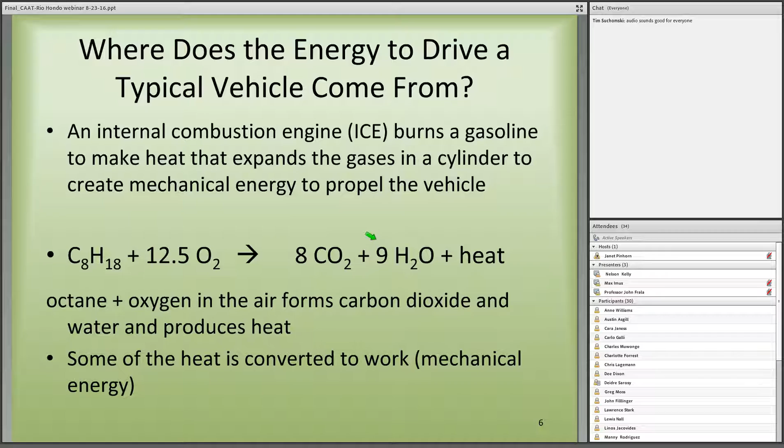And your car is very well set up probably. It has an air-fuel ratio sensor and keeps the mixture what they call stoichiometric, so it's just the right amount, not too much fuel, not too much air. And that system's been very optimized. And it's very reliable and relatively inexpensive. And it uses liquid fuel gasoline that's easy to find, has a high energy density, you can refuel in a few minutes.

But even that perfect combustion that's been around for a long time emits pollutants. It doesn't just emit CO2 and water. There are other things which are regulated by EPA, which I'll mention in a minute. And even that carbon dioxide, a greenhouse gas, and then the slow using up of petroleum, which is a finite resource, isn't sustainable.

Also, that heat engine has something that's called the thermodynamic Carnot efficiency limitation for heat into work. It's about 50 or 60% is the maximum efficiency for the highest temperature and the lowest temperature in that engine. And in the real world, about half of the Carnot efficiency is reached, so maybe 25 or 30%. So that's not real good, and we'll show you that we can do better.

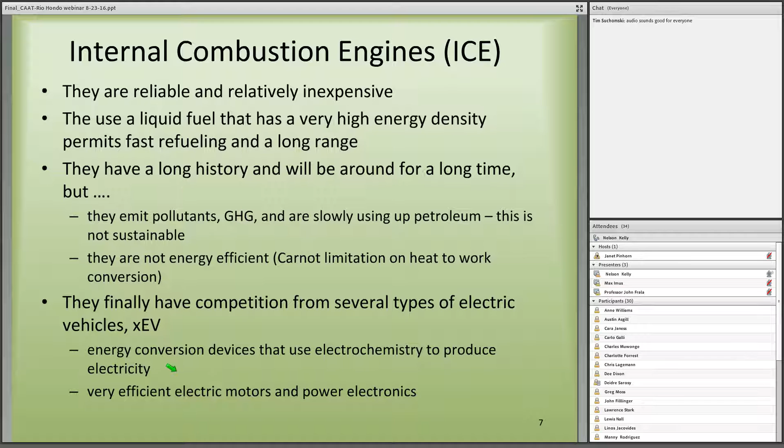And finally, this system has competition from several types of electric vehicles. I'm going to label that XEV, and I'll explain what that is in a minute. But these use electrochemistry to produce electricity, which is used by a very efficient electric motor and power electronics to move the vehicle. So why must automakers build electric vehicles?

Why can't they just keep building internal combustion engines with better control of the air-fuel ratio and better catalysts and better transmissions, et cetera? Well, the Environmental Protection Agency, EPA, and the California Air Resources Board can set pollutant emission standards to protect public health. And these are the criteria pollutants: hydrocarbons, carbon monoxide, nitrogen oxides, sulfur dioxide, lead, and particulate matter. And the National Highway Traffic Safety Administration can set mile per gallon standards, corporate average fuel economy.

So CO2 then becomes regulated as a greenhouse gas, so that perfect combustion making CO2 is not so perfect after all. And the standards are very difficult to reach. 54.5 miles per gallon by 2025, that's a NHTSA number. EPA, which worries about emissions, would say 163 grams of CO2 per mile. These two things are almost equivalent. Well, the current crop of vehicles, say in 2015, gets about half that mileage and emits about twice that much carbon dioxide per mile.

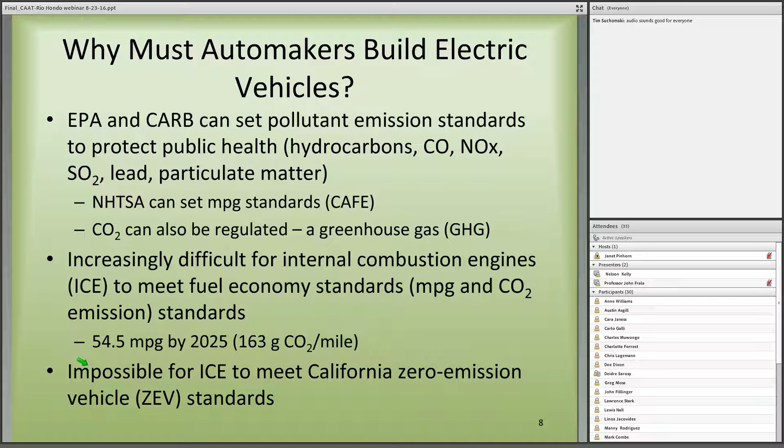So it's just getting harder and harder to meet that by improving gasoline engines or improving the ICE gasoline system. And it's impossible for that system to meet the California ZEV standards, which I'll mention and John will get into. So that's why they're moving to electric vehicles.

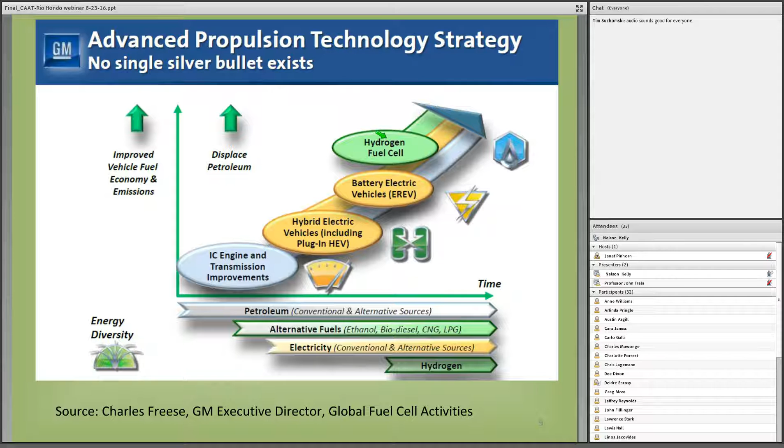So we're displacing petroleum, we're improving fuel economy, and we're reducing emissions. And you can see that at the time GM put the hydrogen fuel cell at the top here, really equal to the battery electric vehicle. So that's the strategy to follow. And it didn't have a single silver bullet. It had all of the above, but ultimately wanted to have more and more of the electric vehicles.

Let's talk about some of the different types of electric vehicles in the nomenclature. If X is H, it's a hybrid electric vehicle that has two powertrains, such as an internal combustion engine and an electric motor, and maybe two ways to store energy, such as gasoline and a battery. If it's a plug-in hybrid, that means it can put gasoline into the tank, and it can also plug into the wall to recharge the battery. A battery vehicle only has a battery, no internal combustion engine, no gasoline. And if X equals FC, it's a fuel cell electric vehicle, and that uses hydrogen. And all of these systems can help to reduce the environmental impact of vehicles relative to the ICE gasoline system.

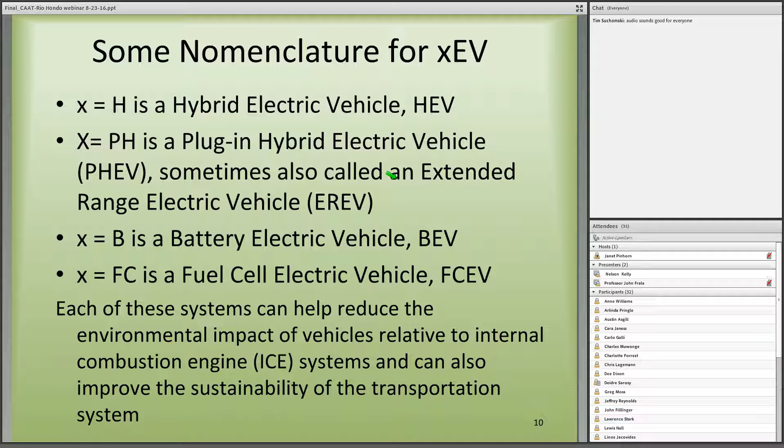Some quick examples here. The most common is the Toyota Prius. That's a hybrid that uses gasoline, but also has an electric motor and a small battery. There's a plug-in hybrid such as a Chevy Volt that tries to use mostly the plug-in. Plug it in, drive 50 miles, and then if you need more range, the gasoline engine starts. GM calls it an extended range electric vehicle, but nobody else does. That was GM speak. They did that because they wanted to say the Chevy Volt was a battery electric vehicle with a range extender. I'm not at GM anymore, so I'm going to call it PHEV.

The BEV examples are the Nissan Leaf and the Tesla Model S, and these are becoming more common, and they're quite desirable. They're getting very good press, especially Tesla, with the vehicles that have such good performance, and the desire to bring out a less expensive vehicle, which GM also wants to do with something called the Chevy Bolt, not to be confused with the Volt. But anyway, the hybrids and the battery electric vehicles are either very common or becoming common.

Now let's talk about the other, the fuel cell electric vehicle. And the one that's been leased in California is the Honda FCX Clarity, and John informed me yesterday it's now called the Clarity. It's a newer version of it. But there's also the Toyota Mirai, which is being sold in California and other places. And Hyundai also has a vehicle, a Tucson, that is a fuel cell electric vehicle. But this is the other. This is in Genesis mode.

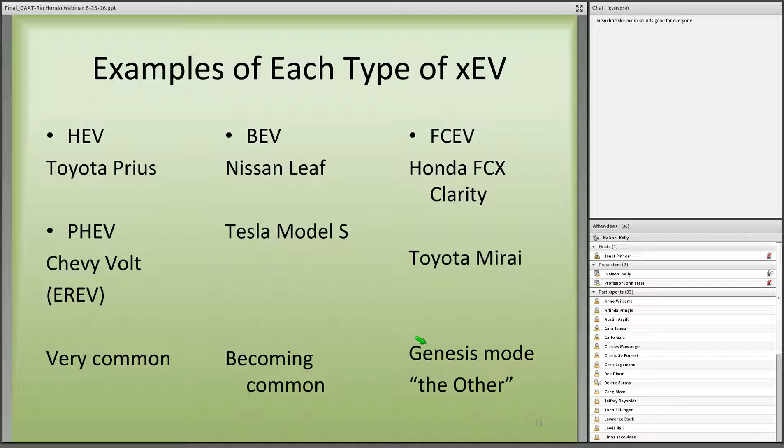So a lot of times it's one versus the other. And most people, when they think of electric vehicles, think of the hybrids because there's so many Toyota Priuses around and they work so well. They get over 50 miles per gallon, and they've been improved over and over and over again. Or they think of the BEVs, the Tesla vehicles.

And one of the reasons is fuel cell vehicles have consistently missed their introduction date. I know at GM we wanted to start selling them around 2005, 2007, and our stated goal at the time was to be the first, not necessarily the first to sell them, but the first to profitably sell 1 million fuel cell electric vehicles. And it's possible GM will still reach that because they haven't lost interest in it, but they're definitely not the first.

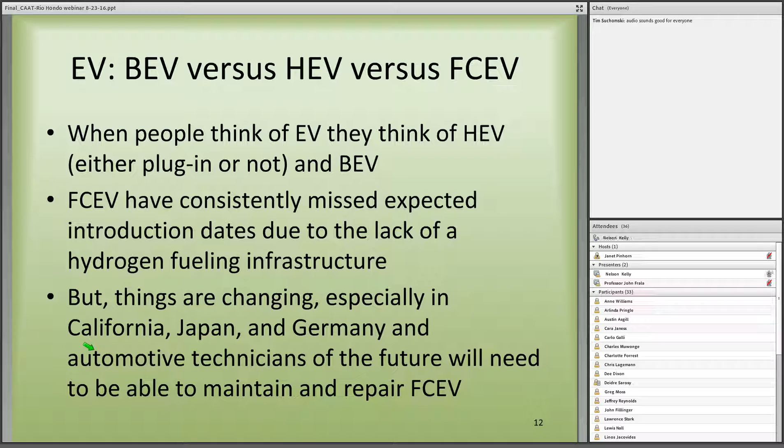And Toyota definitely is leading the pack on this, along with Hyundai and Honda. But things are changing, especially in California, as we'll point out today, and especially Japan and Germany. And the point of it is that automotive technicians in the future will need to be able to maintain and repair these vehicles, which have high voltage, high pressure gas, and a flammable gas.

To understand how fuel cells, and by the way, batteries work, you need to understand something about electrochemistry, oxidation reduction reactions, the anode, the cathode, and the electrolyte, ion flow and current flow in the system, something called the electromotive series of half reactions, the standard potential for those half reactions and how we add them together to get the total potential of the battery or fuel cell, and something called overvoltage, which is an electrical analog of mechanical friction.

We always have to pay for friction. Nothing works perfectly. I don't want to go into a lot of chemistry here, but there's kind of a foundation that you need to know about, and if it's confusing, maybe you need to take a chemistry course to learn about. And the first example of the first type of reaction that we're going to talk about is an oxidation reaction. And here's an example.

Copper solid goes to copper ions in solution, that's what aqueous means, like water solution, and gives up 2 electrons. And that's an oxidation reaction, when electrons are produced in the half reaction. A reduction is just the opposite of that. That might be copper ions, aqueous in solution, gaining 2 electrons and plating out as solid copper. Notice one is the reverse of the other.

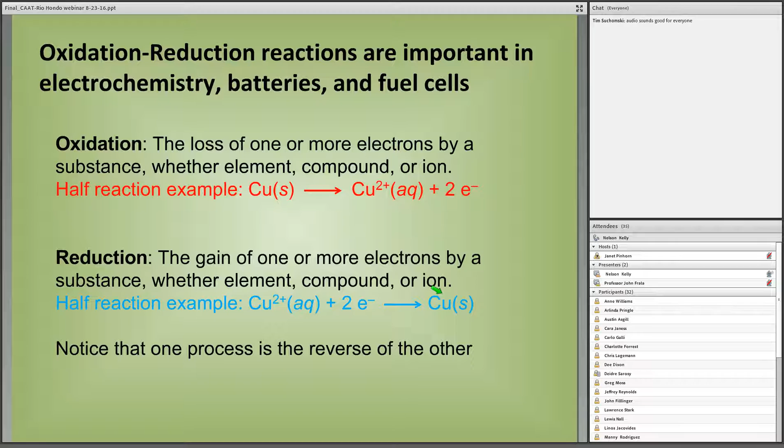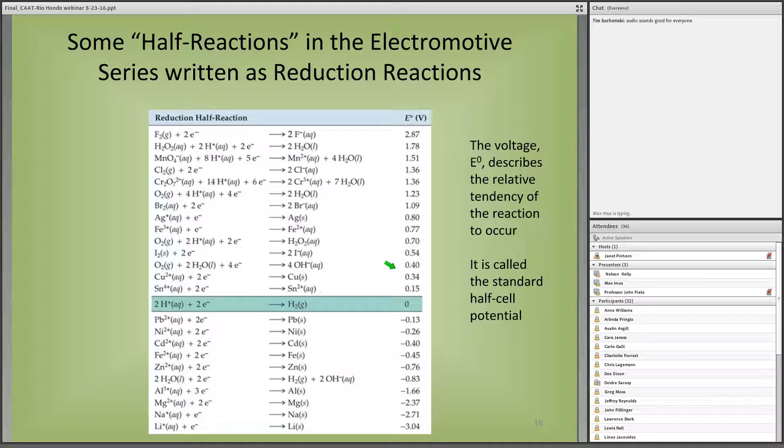I'm just going to point out up here there's also an oxygen reaction here, where oxygen and electrons and hydrogen ions go to water. That's going to be important, and that has 1.23 volts. Keep that in mind for a minute. So now, how do we add these together to make a battery? Well, we can take an oxidation reaction, such as zinc being oxidized to zinc ions, and the reduction half reaction, copper ions being reduced to copper solid.

We add the two together, and this is the overall reaction. Zinc solid plus copper ions goes to zinc ions plus copper solid, plus electrical energy. By adding together these standard potentials, it comes out 1.1 volt. This is called the Daniell cell. It was invented in the 1800s, and it's an early battery. It's a good illustration of how electrochemistry can make electricity. And by the way, this is DC electricity.

This, I think, is a real good way to understand this because it's so picturesque. Let's start in this right-hand beaker here. Here, the zinc is going into solution to form zinc ions, and this is a water solution called aqueous, and it's giving up electrons when it does that. So it's an oxidation reaction.

Those electrons make that zinc electrode, the anode, negative. The place where oxidation occurs, electrochemists always call the anode. Those electrons are flowing over here to the copper, where copper ions meet those electrons and plate out as copper. Copper ions plus electrons form copper solid in that beaker. Notice electrons are flowing in these external wires, whereas ions are flowing between the two beakers in the solution. Electrons don't flow in solution, and ions don't flow through the wire.

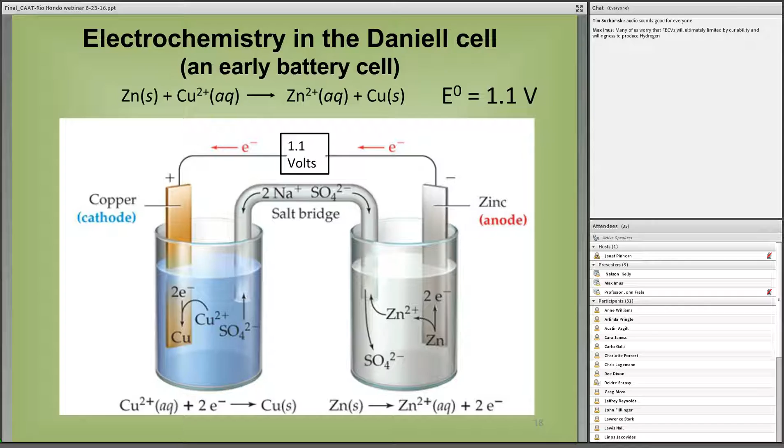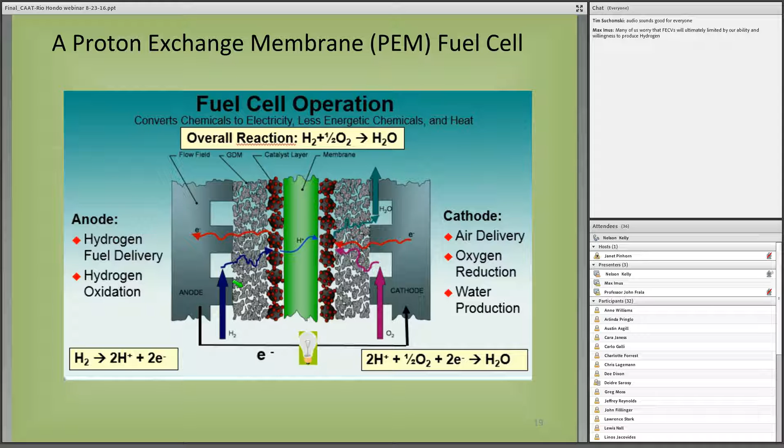So in this case, ions are flowing through this electrolyte, which is a very special electrolyte this time. It's not an aqueous solution of water. It's actually a solid piece of plastic that is permeable to hydrogen ions. And I'll point that out a little better in just a minute. So unlike the battery where it discharges, as long as we keep supplying hydrogen to this side and oxygen or air to this side, because air contains about 20% oxygen and works just fine in a fuel cell, this will keep producing current. And that current can be used to run an electric motor or do something, as I'll show in a minute. Of course, you don't use one cell. Just like a high voltage battery, you put many cells in series to form the high voltage.

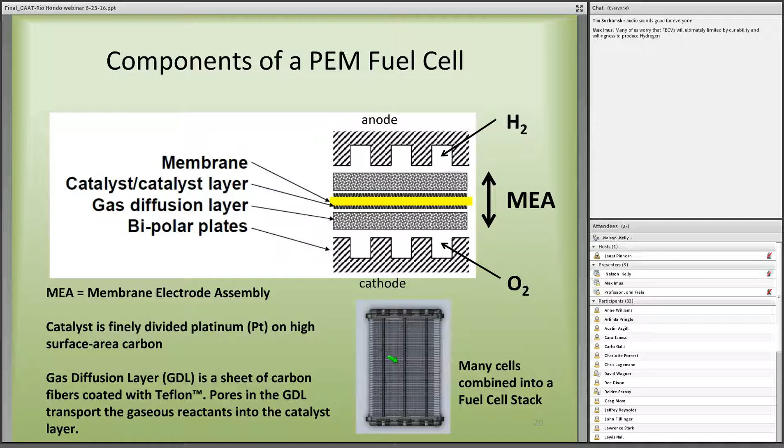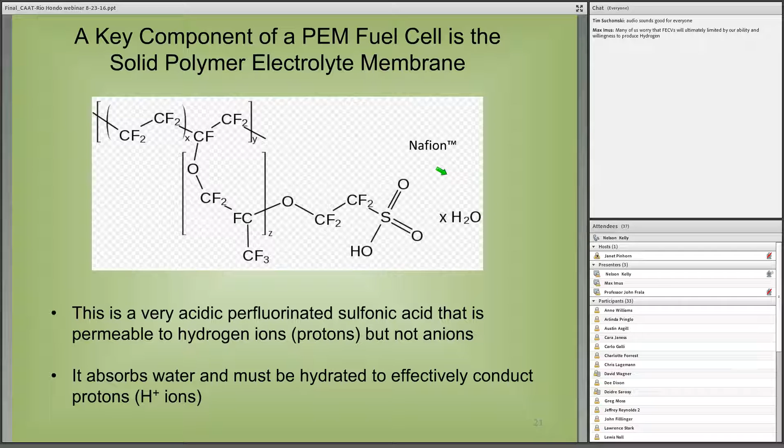I want to say something about this polymer electrolyte membrane. Some people say PEM means polymer electrolyte membrane, but I'm saying it means proton exchange membrane. In other words, it conducts protons. It's a very acidic membrane. As I said, it's plastic, but has these fluorine, which are very electronegative functional groups, as well as these sulfonic acid groups here, SO3, and it absorbs water, and then it conducts protons. So it's a really interesting membrane that is very different than a normal electrolyte that we think of as a liquid. By the way, the electrolyte in lithium-ion batteries isn't aqueous either. It's oftentimes a lithium hexafluorophosphate compound. It's a non-aqueous, non-water type electrolyte, and that's certainly what this is. And by the way, this is a solid.

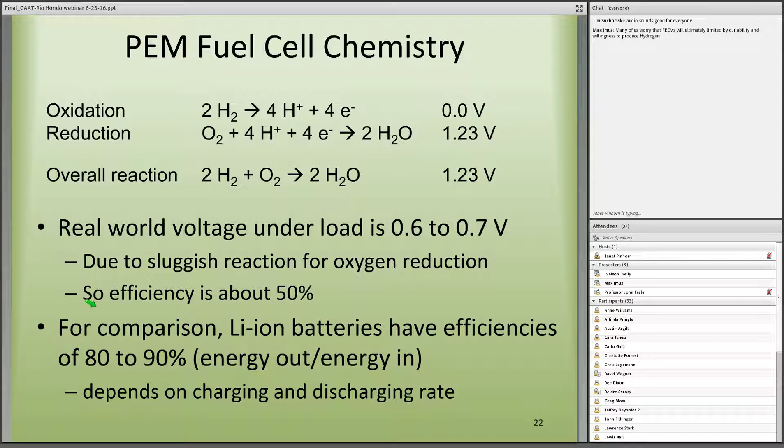Unfortunately, the fuel cell has some loss mechanisms, so we don't get this whole 1.23 volts, and I'll show an example of that in just a minute. We get a little bit over half of that, so the efficiency is maybe 50 or 60%. And that's not as good as lithium-ion batteries that can be 80 or 90% for the energy out versus the energy in. They don't have quite as bad of a sluggish reaction at the reduction portion of the system.

Unfortunately, electrochemists have been studying that electrode for a long time, 50 years or more, and still haven't come up with a better electrode that can reduce that overvoltage.

Let's talk a little bit about hydrogen storage, because that really brings in another safety aspect here and something we have to deal with. The hydrogen is stored as a gas at very high pressure. Hydrogen is very hard to liquefy, so it's stored as a gas at high pressure, 10,000 pounds. If you want to put this in perspective, if you went down 22,500 feet in the ocean, that would be the pressure, extremely high. People who use the metric system would call that 700 bar or 70 megapascals. By the way, a unit of 1 bar of pressure is about 1 atmosphere to us, about 14.7 pounds.

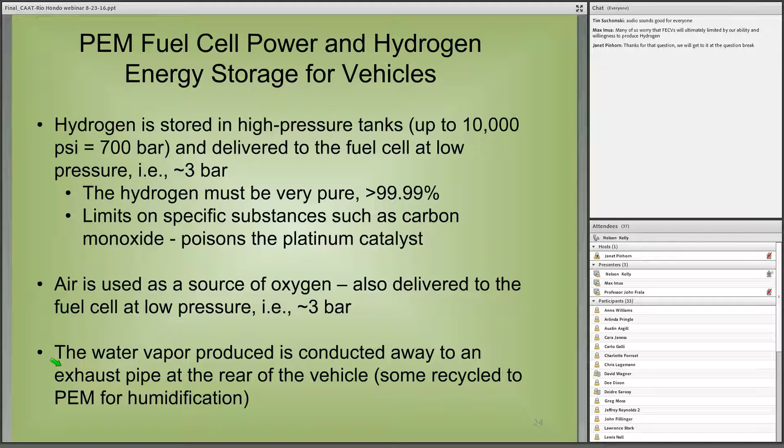And that's delivered at low pressure to the fuel cell. It doesn't need that high pressure. That's just for storing it and squeezing it all into this tank, which I'll show in a minute. Also, the hydrogen has to be very pure, and especially it can't contain things like carbon monoxide. That would poison the catalyst. Air can be used as a source of oxygen in a fuel cell, and it's also supplied to the fuel cell at low pressure typically. And then the water vapor that's produced is conducted away through an exhaust pipe. By the way, if the Army was using this in a desert, they could collect that water and drink it. That's how pure it is.

So the components include the fuel cell stack, which are hundreds of cells in series to get a high voltage, about as high as a battery electric vehicle, 300-400 volts. The storage tank at very high pressure, an electric motor and power inverter, just like the BEV. Why do we need a power inverter? Well, the electric motor in all electric vehicles is an AC motor, so we have to have something that takes the DC to AC. And when we stop an electric vehicle, we want to let the motor become a drag on the vehicle and turn into an alternator, put that electricity right back in the battery. So it has to make the AC from that alternator into DC, so it's a bidirectional inverter.

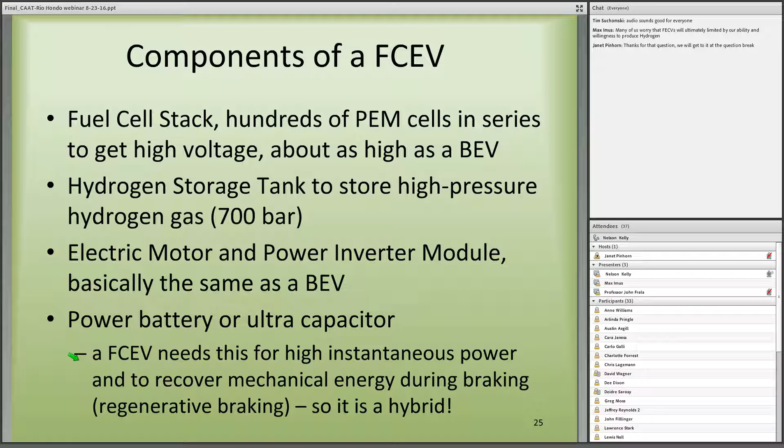And then finally, the power battery. A fuel cell electric vehicle is automatically a hybrid because it needs that little power battery so that it can collect the energy from regenerative braking. It also needs it for the takeoff. Rather than have the fuel cell try to produce all that electricity, it's good to have a power battery do that. So again, let's go back to the picture. The power control unit is the thing that makes DC into AC and AC into DC for the electric motor from the DC source, the fuel cell, or the battery. And then, as I said, these are always AC motors these days.

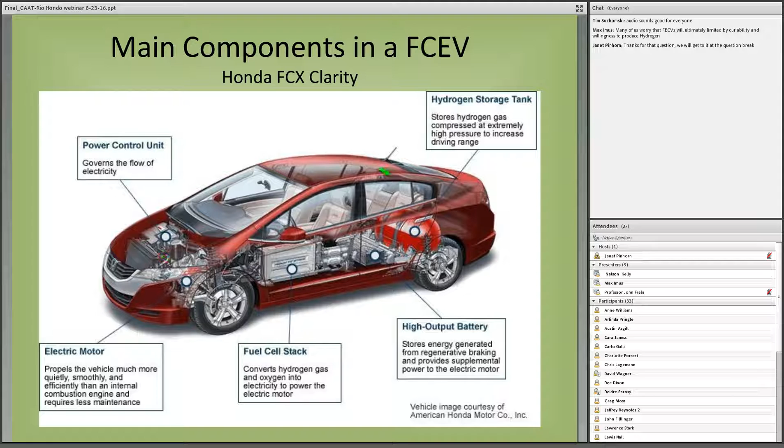They're more efficient. They're about sometimes 90% efficient or more, and that's why these AC synchronous permanent magnet motors are used in electric and fuel cell vehicles. The stack, as I mentioned, this little tiny high output battery to collect regen braking and to give some power for takeoff. And then this tank that has the high pressure hydrogen.

It turns out that 5 kilograms of hydrogen have about the same chemical energy as 5 gallons of gasoline. But since a fuel cell is about twice as efficient as a gasoline engine, that's equivalent to 10 gallons of gasoline, which can easily take the vehicle 200 to 300 miles.

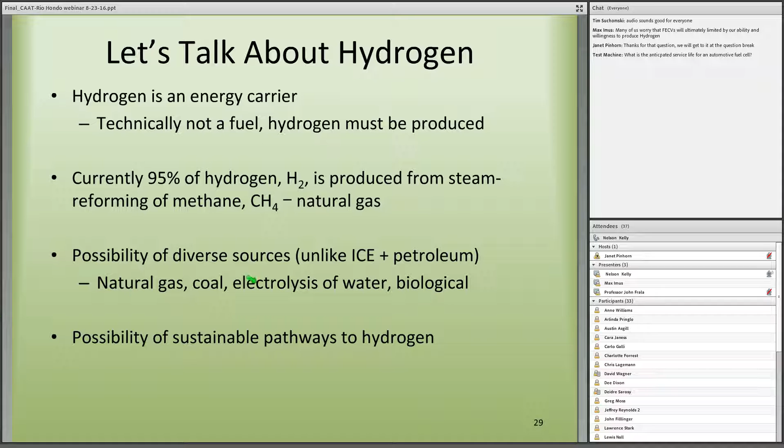But the diversity of the sources is one of the strengths of the hydrogen for a fuel cell vehicle, because it doesn't come from petroleum. Coal, we can electrolyze water, we can use biological, but even those are still not sustainable. Let's look at some sustainable ways to make hydrogen. And I thank my friend at National Renewable Energy Lab for this, who is a very good co-worker of ours at General Motors and helped us get up to speed on a lot of these things.

He starts with solar energy. Solar energy can make heat in a concentrator that can break water apart because it's so hot. It can drive a windmill that makes electricity that electrolyzes water into hydrogen and oxygen, and we store the hydrogen. It can shine on photovoltaic panels. Now, I have more to say about that in a minute. They make electricity that can electrolyze water. It can make biomass, which we can convert to hydrogen.

It can use special bacteria that break water apart, photolyze it, and make hydrogen. Or it can use photoelectrochemistry, which John Turner is the real world expert in, to actually split water in little tiny electrodes that he studied, but in a bigger system. So it's a direct process, unlike this two-step process using PV panels and an electrolyzer.

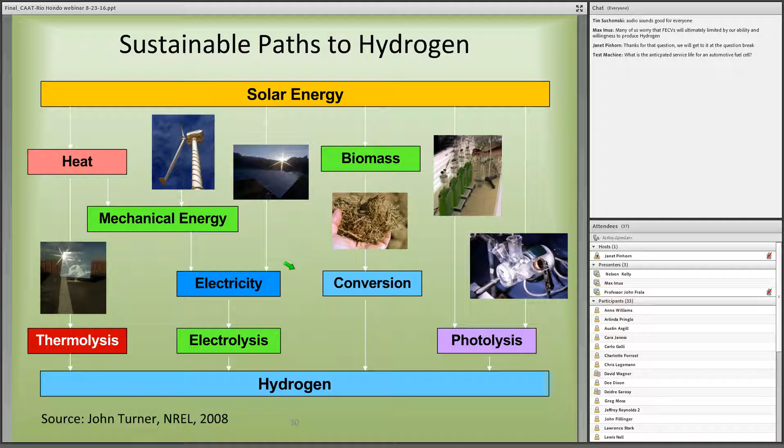Germany, for example, is very interested in solar energy, as is Spain. Germany set a record on June 6, 2014. Half of the electricity was produced by solar energy.

Germany has built a wind to hydrogen project, so that's similar to our solar to hydrogen project. I'm back to John Turner and solar energy doing everything, making even the wind, which it does. But anyway, they use wind energy to split water to make hydrogen, and then use that hydrogen to fuel a vehicle, similar to the way we use solar energy directly to do it. And finally,

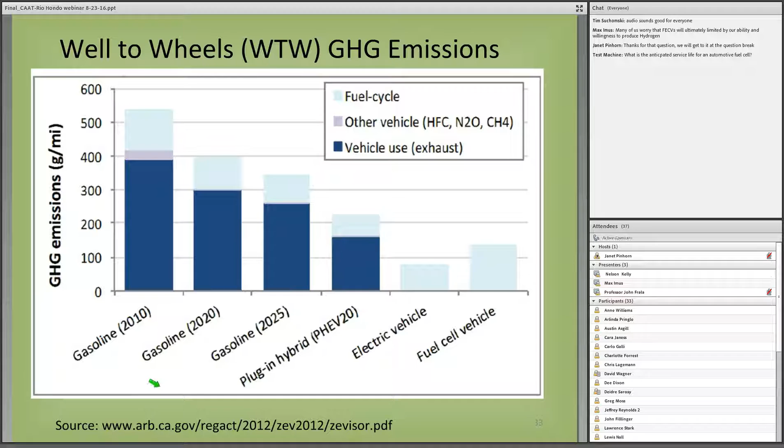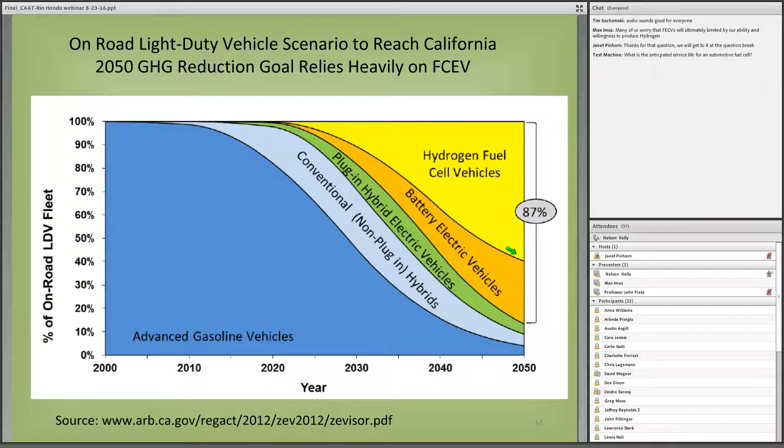So why are some people so critical of fuel cell electric vehicles? Well, they love battery vehicles, and they're great too. And there is an inefficiency if you only look at one aspect, that is making the hydrogen using electricity made at power plants, because there's only a 60% efficiency in electrolysis and another 50 or 60% in the fuel cell, so you're still losing a lot of energy. You also need a fueling infrastructure, and who wants to step up and do that? Well, we'll show that in a minute.

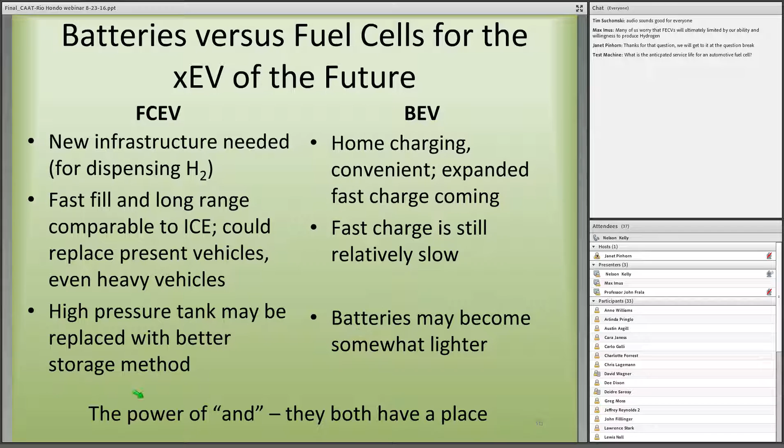There may be a better way to store hydrogen than high pressure, and batteries should become lighter. And I'm going to call this the power of and, that they both have a place in an advanced powertrain portfolio. So in summary, the vehicles are here, all these different types.

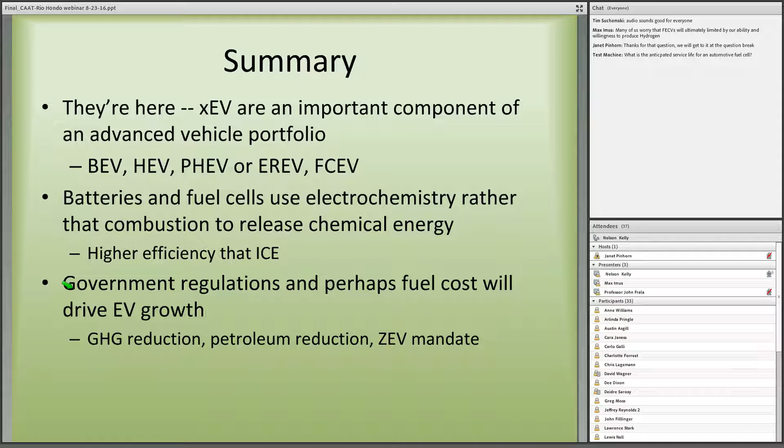The batteries and fuel cells use electrochemistry, so you need to learn something about chemistry, oxidation reduction, which we call redox reactions, rather than combustion, because that gives higher efficiency. Government regulations are driving this: the greenhouse gas reduction, petroleum reduction, and the ZEV mandate.

And both these vehicles have some advantages and limitations, and rather than worry about the limitations, let's work on them and improve them, because they're both going to reduce the impact of vehicles on the planet and contribute to a more sustainable transportation system. And this is the power of and. They could satisfy different groups of customers.

And finally, renewable energy. The synergy of renewable energy in these electric vehicles, and maybe even synergy with connected automated vehicles, is a very strong point.

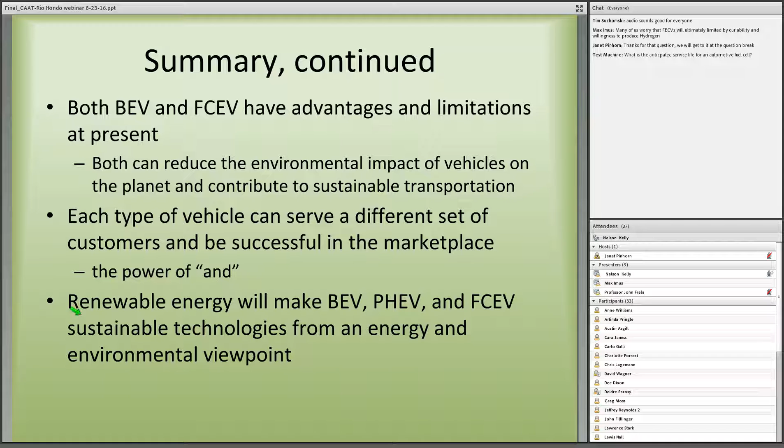So now let me just give you some resources for further use. The Department of Energy has an excellent site that explains these technologies and the different types of fuel cells, and they have an annual meeting where they talk about producing hydrogen and work on fuel cells and all the aspects of this. And the alternative fuel site, this is going to tell you about hydrogen, natural gas, biofuels, ethanol. That's a very good site.

Of course, the California sites, the ARB, John will mention this in a minute, and the Fuel Cell Partnership. And the Northeast states are joining California, at least in their ideals, and they have some good things going on and should be looked at. And finally, a shout out to our own site here at CAAT.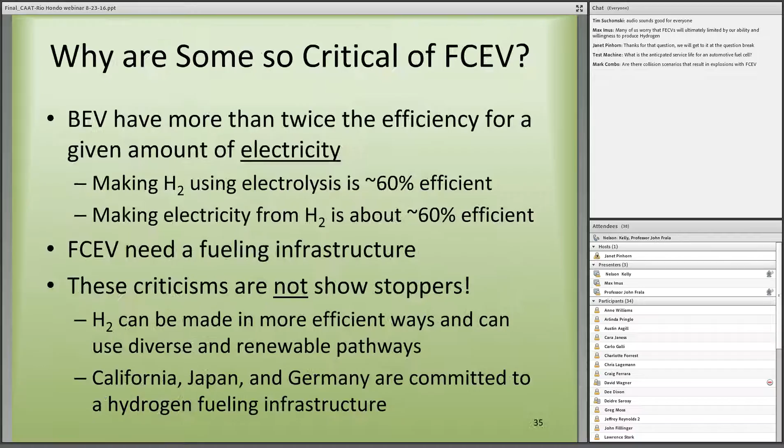Charles Freese, I'm going back to that slide because it's actually on there, says 3 minutes. I would say closer to 5 minutes. I've done this. I fueled these vehicles with the 700 bar hydrogen, and it's pretty uneventful. Depending on the station, we had two of them at GM, one that didn't communicate with the car and one that did. But either one, you pull down a handle and it kind of locks in, and then, 5 minutes later, it's full. It's 5 to 8 minutes right now in California.

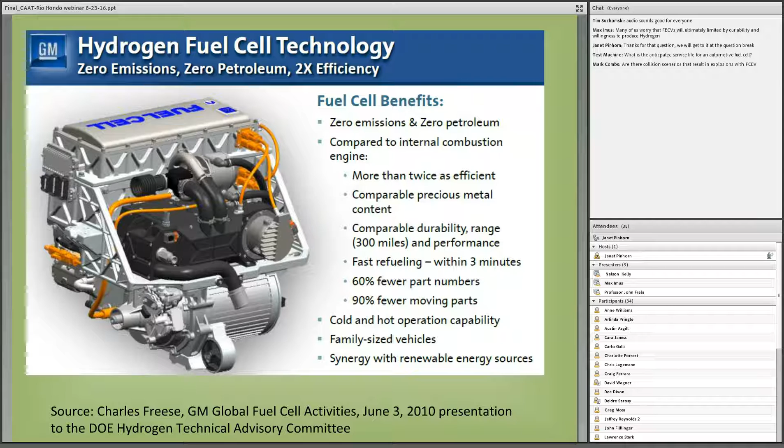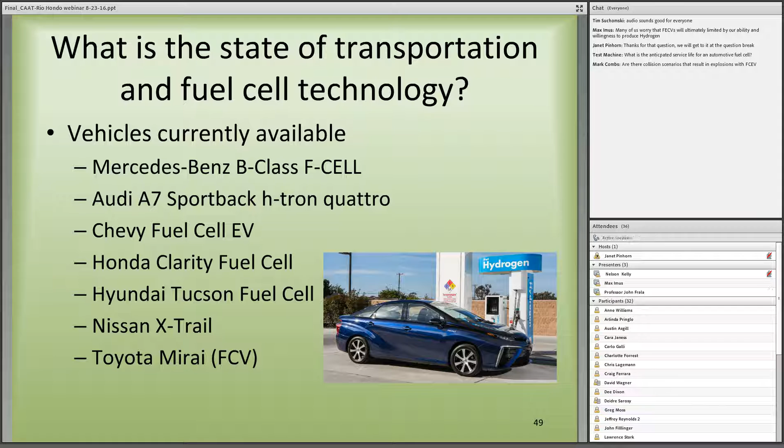And so you'll see right now, these are the vehicles that are available right now. You can buy them, you can lease them, and they are selling here pretty quick. So some of the manufacturers have actually got small fueling stations on their property. So this is what I was talking about a little bit earlier.

We've gone up to 19 different transit agencies totally off that money. The oldest out here that's had this technology is Sunline Transit. They're located in the Palm Springs area. They've been running fuel cell buses for about the past 8 years. And this is one of my partners out here. I am partnered with them in developing curriculum and putting together some of the safety training that's going to go into the other agencies.

AC Transit's around San Francisco. They have their own fueling infrastructure, and they're using an experimental system to compress their hydrogen, which is using a hydraulic system, not a conventional compressor system. So if you go to their website, they have pictures and animation of that new type of compression, which seems to be working very well. Orange County Transit just got their very first fuel cell bus last month. So even the local guys here around me are getting on this.

The other people that are using this stuff, Class 8 vehicles now, drayage trucks. California ports of Los Angeles and Long Beach have very strict laws on the ports. You cannot take a diesel truck on the port. It has to be something of alternative energy, which would be compressed natural gas. Liquid natural gas seems to be a real favorite. And they are starting to run a hybrid system out there that BAE is making for some of the different truck manufacturers.

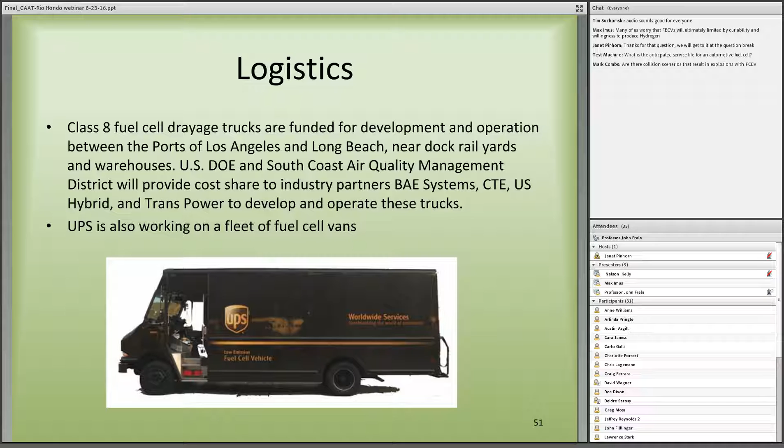Where my group comes into this now, California AB 8. We've set the money aside, and it's every year thereafter. So this is not a grandfathering grant. We have allocated $20 million annually, started December 2015. This is for infrastructure, product, and education. So California now says we need education to make sure this happens correctly. We have 59 stations that are in place or will be in place by the end of this year. The goal is to have at least 100 publicly available stations in California by the end of 2018.

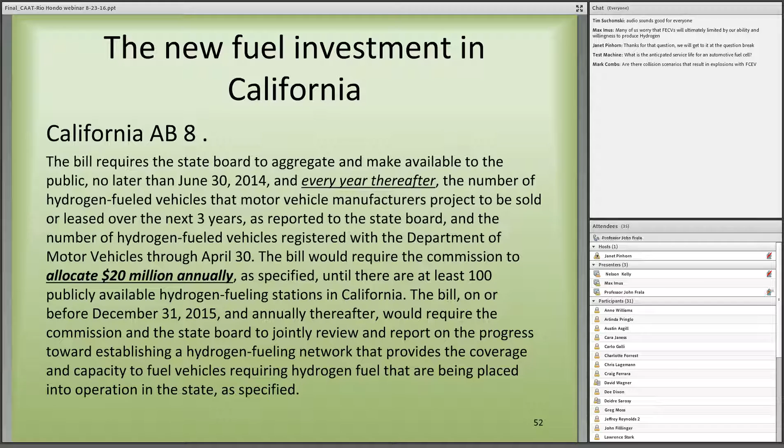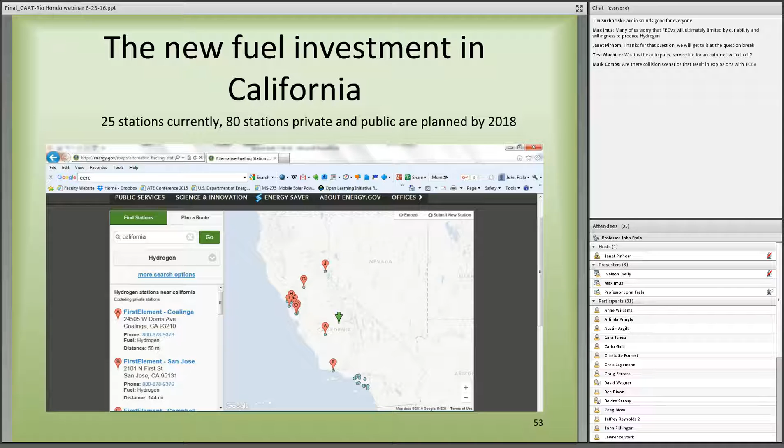So this is California Fuel Cell Partnership. They are partners with just about everybody. They're running a very active map. So some of them, like Toyota Mirai right now, they have this map active in their vehicles. You punch up the dashboard, it'll tell you where the fueling station closest to you is, and if you're capable of making it there with the amount of fuel that you'll have in the vehicle at the time. So this GPS, this automation stuff is actually already in the vehicles, and it's happening right now.

So this brings me back to my students. A typical automotive student is in the field known as a gearhead. They like internal combustion motors. They like to race them and play with them and modify them and things like that. The typical technician that's going into this type of technology that we're talking about now, electric cars, hybrids, fuel cells, they're a whole different group. They're very green energy minded, they're environmentally minded, and they want to make a statement by what they're working on and what they're producing and how they're going to make the air cleaner in California.

So this student now has got to go back and look at STEM type sciences, which would be science, technology, engineering, and math. A lot of physics, a lot of chemistry, and a lot of math go into my classes. We've got students that have to have mechanical skills that a normal mechanic would have, but now they have to have electronic skills. And notice I did not say electrical skills. I'm talking about electronic, which Nelson had touched on earlier. We are looking at high voltage electronics that are switching voltages from very high voltages to very low voltages and recapturing lost energy in braking and cruising to put it back into the battery packs.

So there's a lot of conversions, a lot of very expensive electronic pieces in there. My students also have to understand the software skills now to read the computers, to go in there and basically look at the onboard computer system. A Toyota Prius right now has 17 to 19 computers on it.

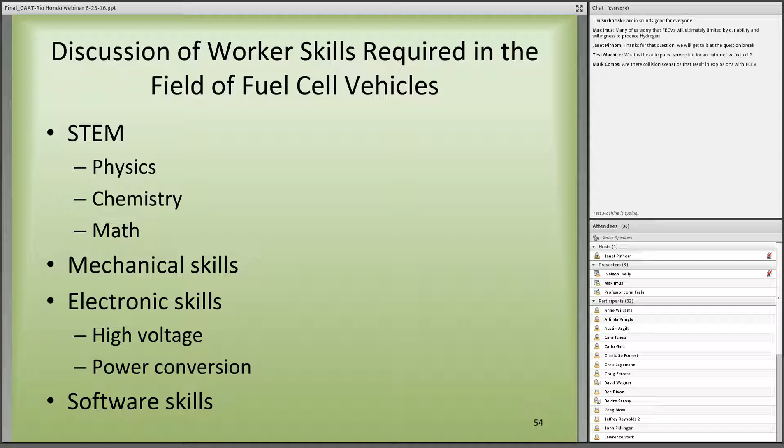So my students have to be able to go in that software, determine which computer system has got a malfunction, and correctly identify what the problem was. It might not be a computer, it might be something else that's causing the error or causing the malfunction. So the students have got to get better skills than what they normally would to be an automotive mechanic.

So this brings up the other side of why this degree came about. We are losing cars with oil changes at 3,000 miles. As most of you know, the vehicles that you drive day to day, the oil changes are now using very high synthetic oils, manufactured oils. Oil qualities have changed quite a bit, and you don't have to have an oil change every 3,000 miles. You're going 7,500, 10,000 miles. Some of them are going as high as 18,000 miles.

Well, on a hybrid, the engine shuts off sometimes as much as 60% of the life of that engine, so it's extended the life of that engine. So that means now my technicians don't have to look at replacing brakes. Brakes are going 150,000, 200,000. I've seen them as high as 320,000 miles on a hybrid. On an electric car right now, we've got an electric car that has 99,000 miles on it and still has the factory original brakes on it.

So my students are not looking at doing maintenance, they're looking at doing more of high voltage corrections, looking at batteries, syncing batteries, and making sure the systems are operating correctly. But they've also got to look at basic automotive skills for the braking systems and things like that. What's changed on the cars is we no longer have drive belts to drive these accessories. All the drive accessories now have gone to electronics. They're on CAN protocols, much like your phone talks on.

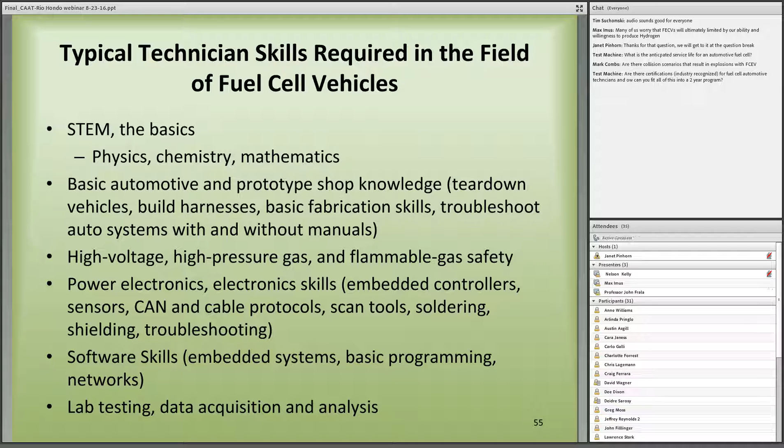So when my degree first got put together as a brainstorm, we went to ONET, who does all the job classifications in the States. And ONET basically said, well, isn't that just an auto mechanic? And we had to go back and re-educate them. Same thing with the California Employment Development Agency. There were no job classifications for a fuel cell technician or electric vehicle technician in existence. So we created this with the help of them and many of the people on the think tank team and came up with a job description. And this is what ONET has basically posted on their skill level.

So you can see assembling fuel stacks according to the mechanical, electrical assembly, building fuel cell prototypes, following engineering specifications. So now a typical mechanic has to have engineering skills. So these guys are not the guy that's going to go out there and make $12 an hour. They're going to be well educated and be making quite a bit more money.

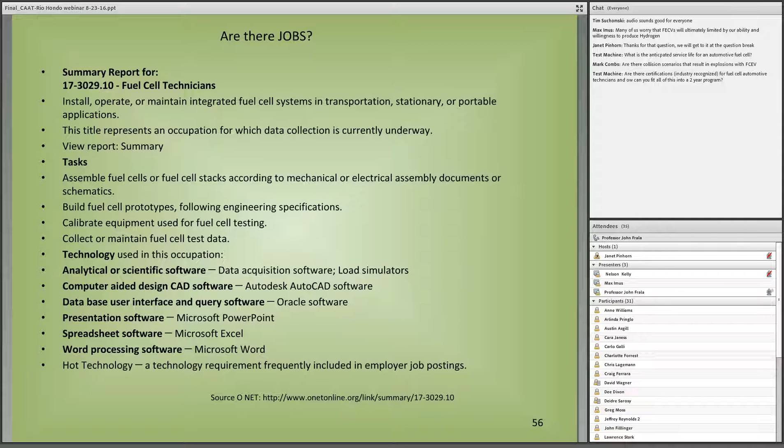Job sources right now that are out there, we have seen ONET's skills are saying somewhere in the area of 12,000 nationally. California is looking for somewhere in the area of 7,000 within the state within the next 5 years. So we have a lot of jobs out here for guys that have these skills. So as we go back and talk to the manufacturers, they're wanting better education.

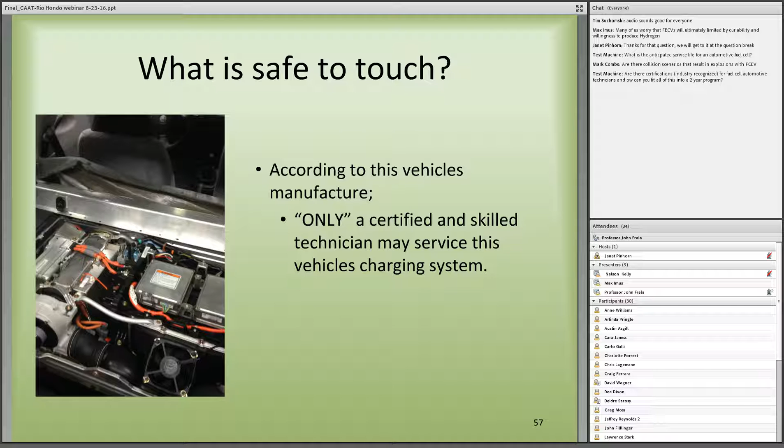So if I have a technician that is only able to work in this, it's certified in the skills area, what is a certified technician? And that's a question we haven't been able to answer yet. This is such an emerging technology. The skill sets are being developed as we talk, and I'm heavily involved in those negotiations right now with a couple of the certifying entities.

We've had some discussions with SAE, which we're on the committees, and ASE, which now has an L3 certification for hybrid and electric vehicles, but not fuel cells yet. We've already had some talks and discussions with them. So this is very typical of what my current tech is looking at in a vehicle. Much like what Nelson was showing earlier in the car, this is kind of a breakdown.

This is a Mirai, and you'll notice a couple of things on this that are different than what you would see on a normal passenger car. Yes, I have an electronic engine up here. I have an electronic controller that controls that engine, but I still have a mechanical braking system. I have a fuel cell stack right here that does all the fuel cell exchange to electricity, high pressure piping at 10,000 psi, two different fuel tanks which require fuel tank certification, which is being developed right now,

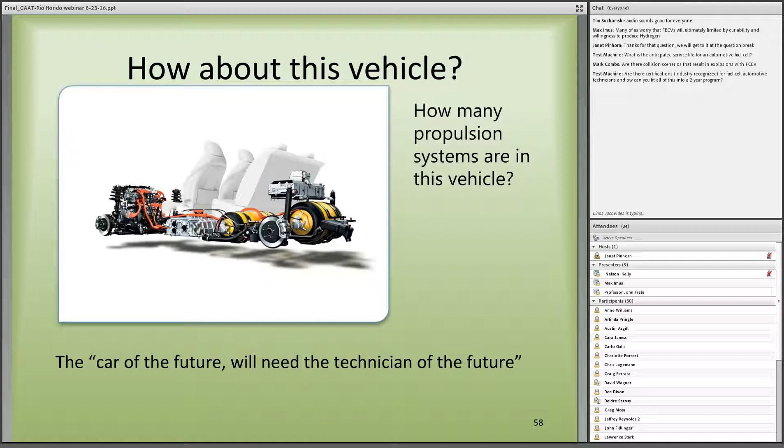and a standard battery. This would be the almost identical battery that would be in a Camry. So this is nickel metal hydride. So I have a 12-volt operating system for the accessories in the car, yet I have a high voltage system. So I have basically four different propulsion systems on the same vehicle that the technician now has to understand, whereas before they had a gasoline internal combustion engine and all they had to know was that. So the technicians have to know these things.

So these are some pictures of my students in the labs actually working on these things. And what's hands-on, high voltage, this happens to be a compressor out of a Prius, which is 201 volts up to 248 volts. Remember, we no longer have a drive belt moving that air compressor. We're doing it with electronics. Now it takes a special fluid to go in it because it can't be conductive to electronics. Otherwise, the compressor will catch on fire or explode if you've got the wrong chemicals in it. So the students are hand trained on the physical piece. They take it apart, they put it together, and then we go out and test it.

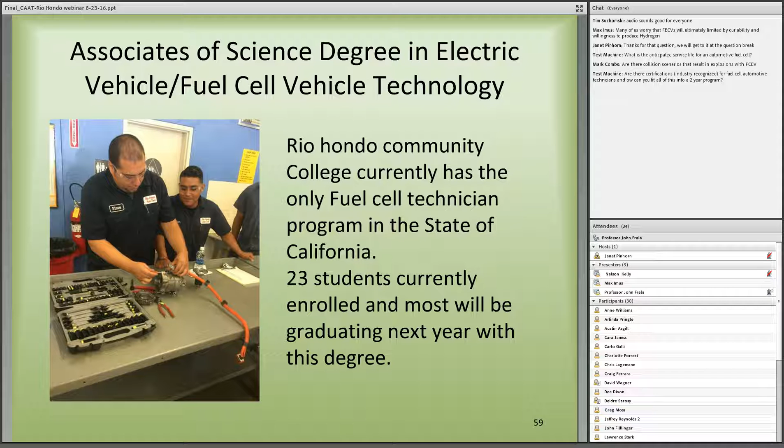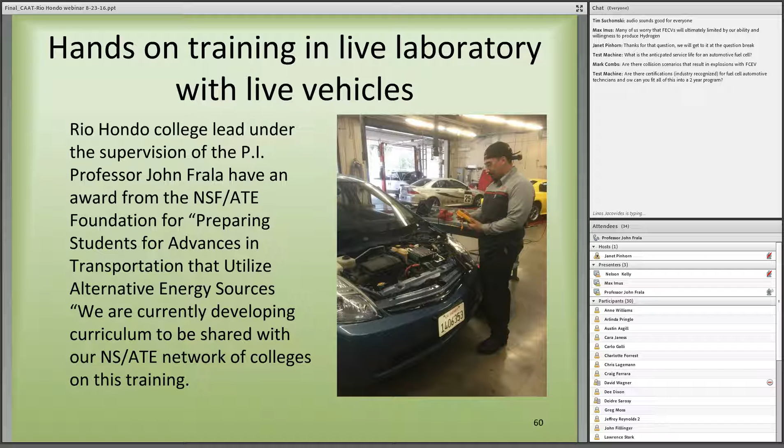So currently, I have the only fuel cell technician program in the state of California. 23 students are currently enrolled in this, and about half of them are going to be graduating this May. They're that advanced. They are working in the industry. They're preparing to go into it. This is actually a technician that works for Penske Motors at a Toyota store. He comes to our campus because he can get further information from us that you cannot get from the factory, because their factory gives them down to components and we give them down to the systems. So they're able to help us develop this curriculum that we'll be sharing also.

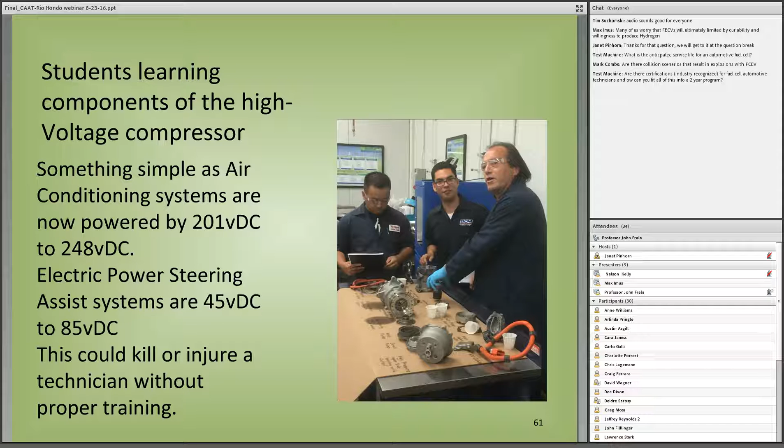The other piece is for the big transit buses. These high pressure systems that go out on their air conditioning compressors are 248 volts. Your car that you're driving has electric power assist now. It could be 45 volts to 85 volts. So if a technician does not know this, he could get killed or get really hurt pretty bad. Electrical burns, things like that. So we're bringing the students up to the current technology as fast as we can, and these guys get jobs as fast as they start going through this.

So from that seed money that California started of $200 million and putting the $20 million thereafter, we've been able to develop a complete program, get the students knowledge, get them a certificate, get them an associate's degree that's transferable into our bachelor's program, and get them into either a master's program or into the industry working. This has been a great partnership with California. They've been able to come back, and we've been able to take what we've developed with them. We are sharing this with Central Oregon now.

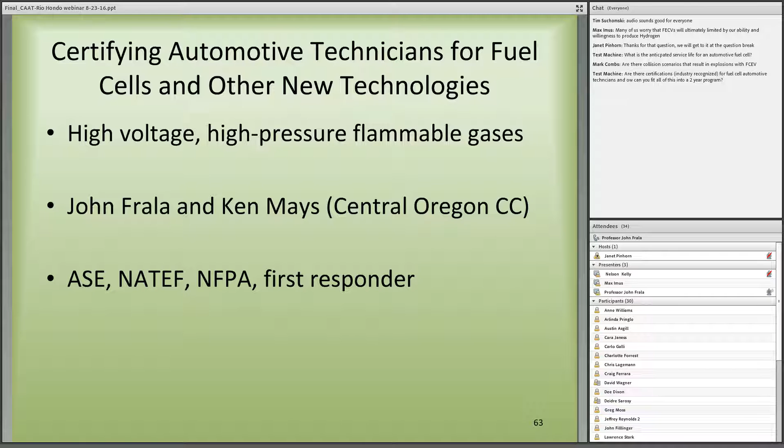Ken Mays and myself are doing a joint project here. And these are the people we're talking with, trying to figure out who's going to do the certification for these technicians. Because coming with the new technology, we need to have these guys have that technology to take out with them to be safe to work on the vehicle, but we want the consumers also to be safe.

Besides working on the vehicles, we're working on stationary power supply, which would be fuel cells that are replacing the generators. So this is something we just moved into with solid oxide fuel cells. We're currently building our lab right now with a $200,000 grant that the state of California has put out for the existing programs. We'll be getting that probably in January, and we will be building a solid oxide fuel cell lab here so we can now move students out of transportation to home energy and backup generation too.